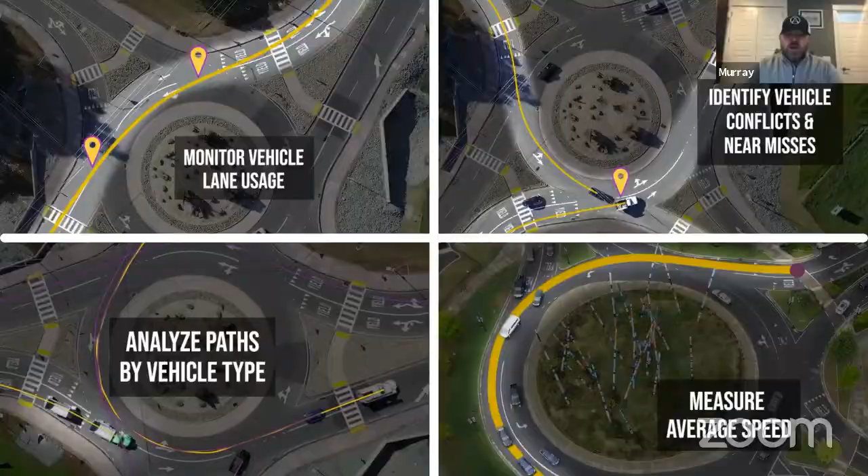Mark Lenters has been really helpful and a front runner in using this technology. We've worked with Mark and Kimley-Horn on a number of projects in multiple states. And I just wanted to highlight quickly one we did for him, looking at truck traffic specifically around a large commercial location. Using the drone technology and the AI software, we're looking to provide unique vehicle identification numbers, looking at lane tracking, specifically, what lanes are the trucks using going through the roundabout, and from a heavy truck standpoint to see if they were utilizing individual lanes or cutting corners based on the size of the roundabout.

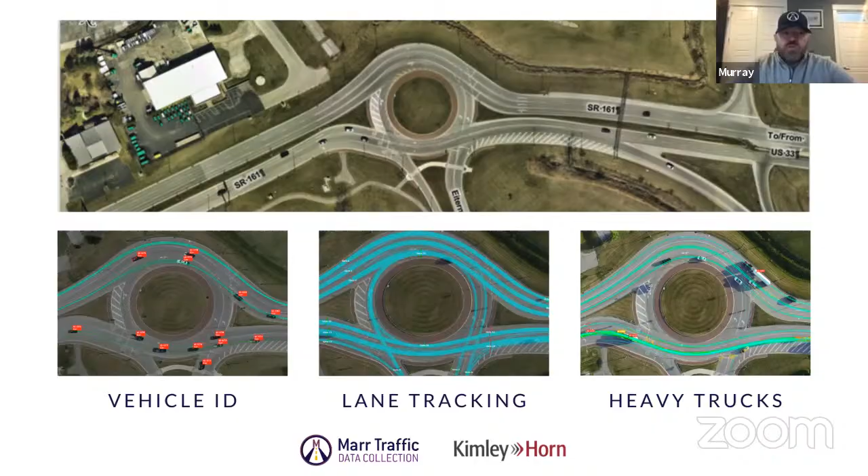So Mark has got a lot of information and knowledge on this subject. So if anyone wants to speak to him specifically about that, I'm sure he'd be glad to give you some other thoughts. The drone footage is great for not just roundabouts, but we can utilize it for standard intersections, interchanges, and more complicated information purposes, specifically looking at some short range origin destination and things like that. So it really is an opportunity to utilize this technology for some more complicated and interesting opportunities. And now I just wanted to finish off by sharing a short video and showing you some of the highlights in action.

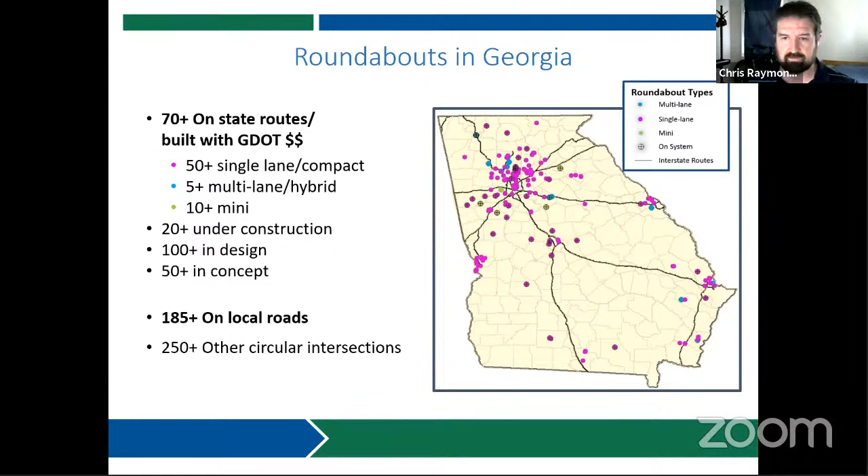And talk to you really about why we created this guide a year ago, and why we're updating it. As you can see, we've got over 70 roundabouts on the ground, and that's been put down over the last 20 years. But what we're seeing now with the introduction of ICE, intersection control evaluation, is that we're getting just a ton more moving to construction and design. So you see 20 under construction, 100 in design. The 50 in concept's probably conservative. And what we really decided we needed was something that would help younger engineers. As we get this many projects, there aren't enough Mark Lenters of the world out there to design every roundabout that we're putting down. So we really thought it was important to get this guide out to assist the younger, less experienced designer with roundabouts, to get them some good guidance on how to properly design a roundabout.

And the existing material that's out there, chapter 8 of the design policy manual, has some information on roundabouts, but it's pretty bare bones. NCHRP 672 has a lot of information, but doesn't really focus on helping young engineers. We're also trying to focus on practical design. Again, as more roundabouts get out there, costs tend to go up. We don't have the luxury of doing gold-plated designs every time anymore. So really, beyond just helping the young engineer, we're also focusing on elements that would help save cost but maintain a vast majority of the safety benefits that roundabouts provide.

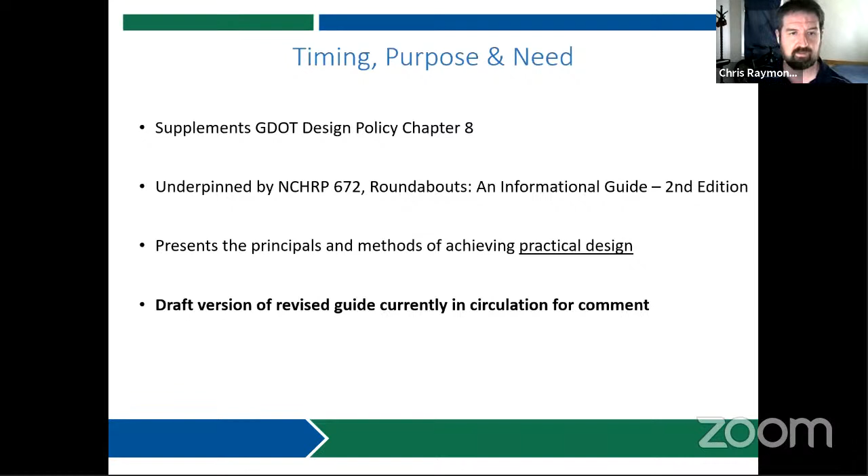So yeah, as you're probably all familiar with, we have single lane roundabouts. We have mini, which are fully mountable, truck aprons, compact, which are basically smaller conventional roundabouts, but they're all pretty, fairly similar. What we're getting more into now, though, in Georgia, we have a fair bit of hybrids on the ground, and we're soon going to be getting more multi-lane. But

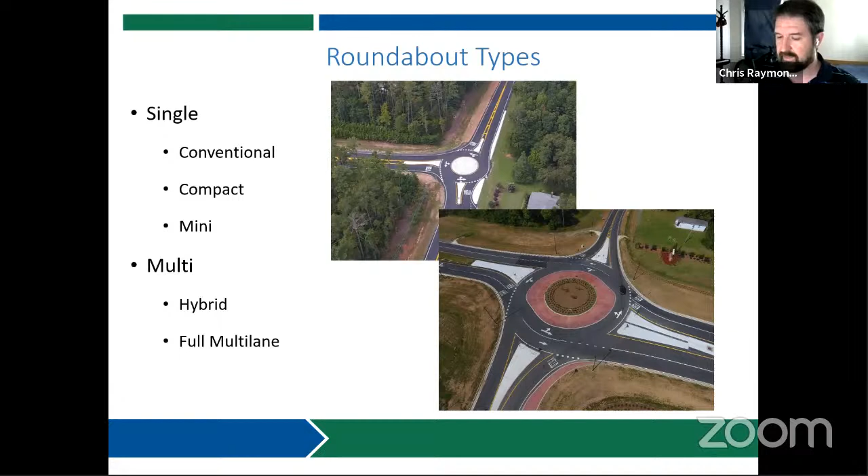So moving directly into geometric design, we have updated our iteration flow chart to really go in and give the designer an idea of the process they should expect as they're developing the roundabout layout. It's not just as simple as drawing a circle, drawing some entries, and you're all done. You got to look at the ops data, figure out your lane configuration, see if it's sufficient,

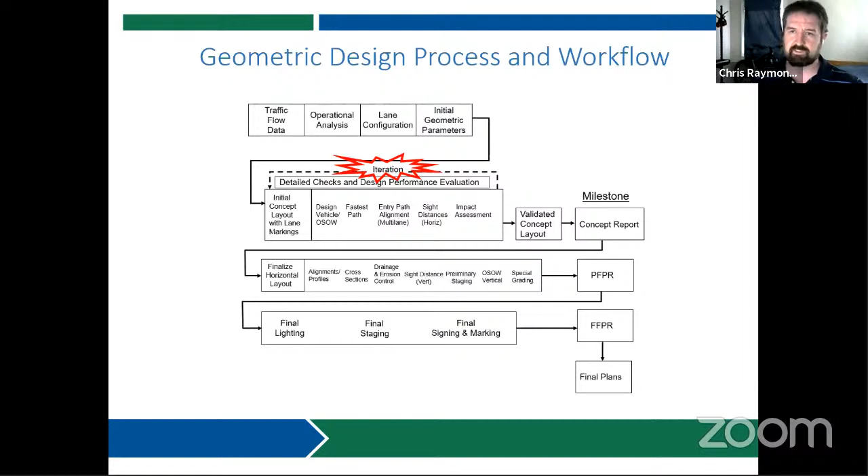and then instead of moving from just a single lane and going directly to a full 2x2, again, for the purpose of practical design, we're looking at adding lanes on the legs that are necessary in the configuration that's most economical and honestly the safest. If you add a full 2x2 when you don't need it, you're adding more conflict points that didn't need to be there. So really focusing on the iterative process of going through and adding lanes as needed, right turn bypasses or dual entries or dedicated lefts, things of that nature.

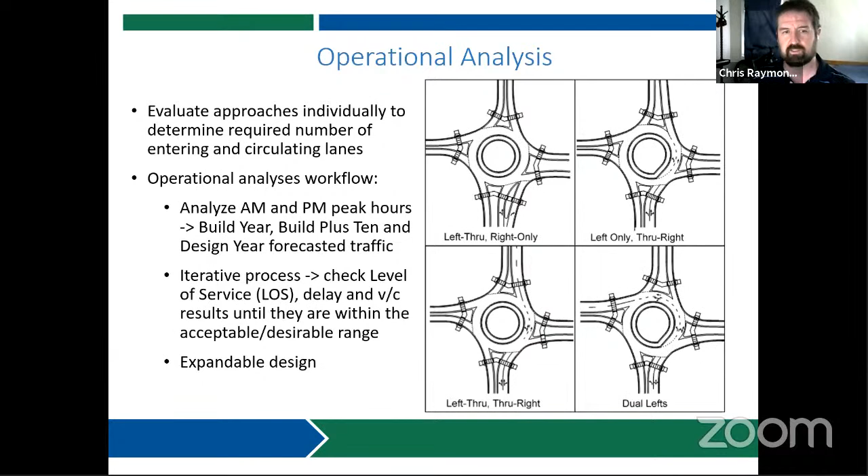And the way we are guiding engineers to do that is with Sidra as our preferred analysis tool. It has a few benefits in that it has multiple formulas that you can use in one package. They got the Sidra specific formulas as well as the HCM formulas, and it also has the benefit of having pretty pictures. So you can look at the roundabout and see exactly what you're drawing, or see if what you wanted is actually being displayed correctly. That's really useful, and not as clear on some of the other analysis tools.

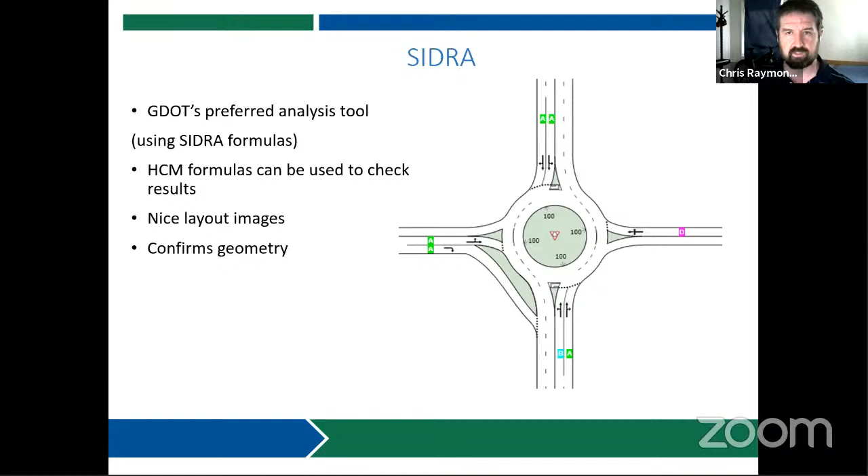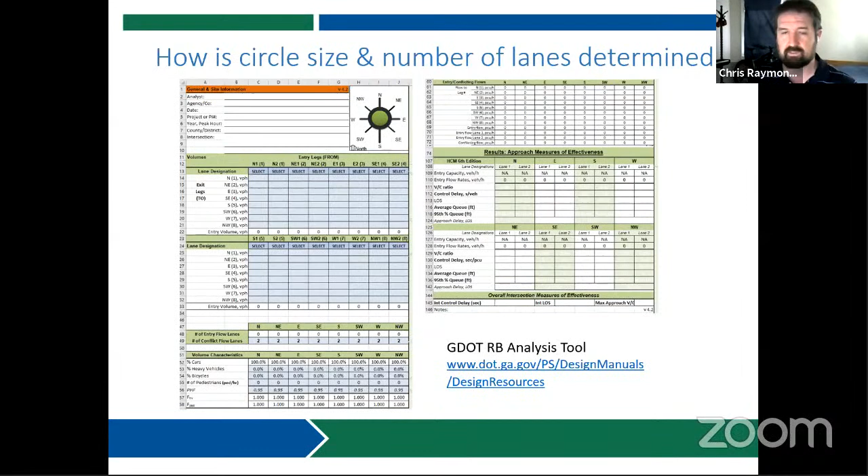Not that we want to dog them, certainly. I mean, the roundabout analysis tool is a very good tool to use as well. It focuses only on the HCM formulas, but yeah, it's good. It doesn't have the whiz bang displays, but it's free, so good to pay for.

Some of the core elements that we're focusing on for young designers, or on all designers, I suppose, is ensuring space for trucks, proper speed reduction, adequate sight distance, but not too much sight distance. Accommodations for cyclists and pedestrians, and also especially on multi-lanes, providing path alignment and channelization, so ensuring the driver knows which lane to be in and has a clear path to maintain that lane, and knows which lane they need to carry forth into as they navigate the roundabout.

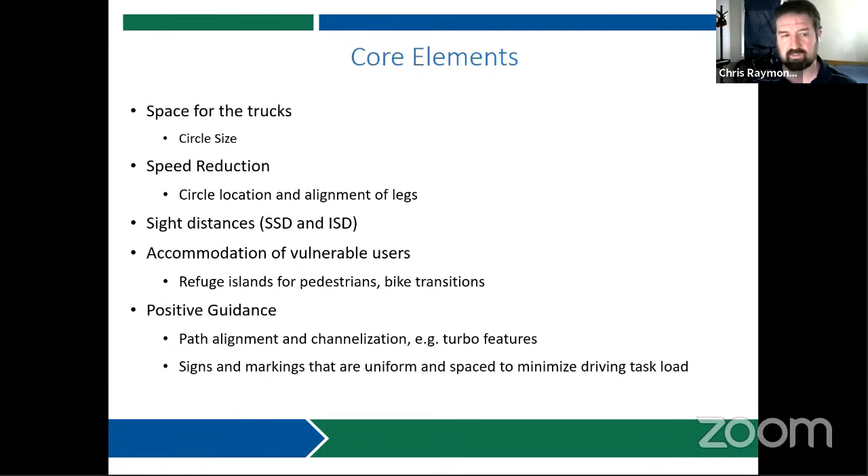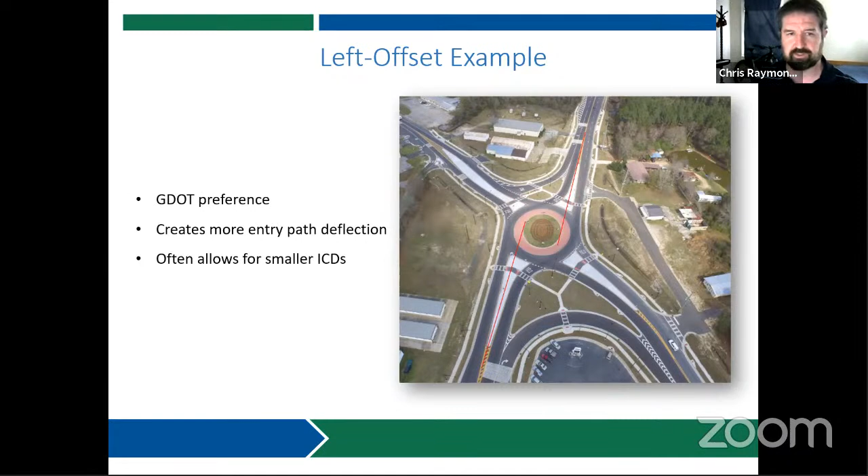An example of the path alignment and speed control is a left offset example I'm showing you here. It's a preferred layout. It helps with speed control on entry paths. It helps with reducing the inscribed diameter, which again goes to providing more compact design, which helps reduce costs. So couple that with helping young engineers. That's what this is all about.

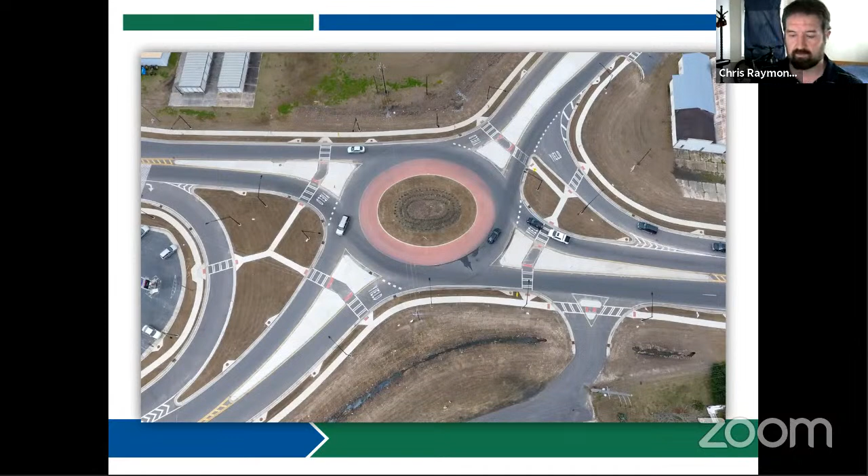Here's an example down in Colquitt County. Had a heavily skewed intersection, and along with providing left offset, we also utilized the additional space. Instead of creating a large circular intersection, we stretched it out into an ellipse to maintain the speed control that we needed, as well as allowing truck movements, but didn't have to go to a large round circle and take up more right of way or increase overall cost of the project.

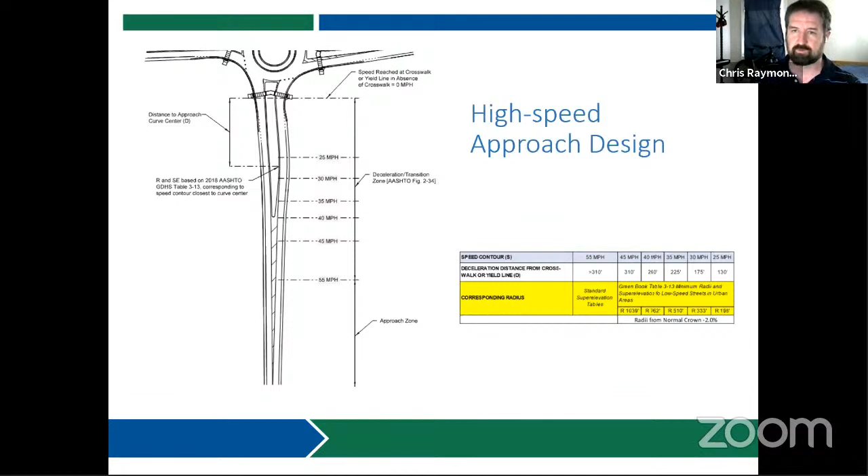Another section that we're focusing on that has come up a lot with design is the high speed approach. How you're stepping down superelevation as you're approaching a roundabout that comes in on a curve. There's been a lot of questions on how that's handled, since the expectation is that you slow down as you approach a roundabout. But there was really no clear guidance on how you would step down your superelevation. You don't necessarily want them coming in with full super as they're getting closer and closer to the roundabout.

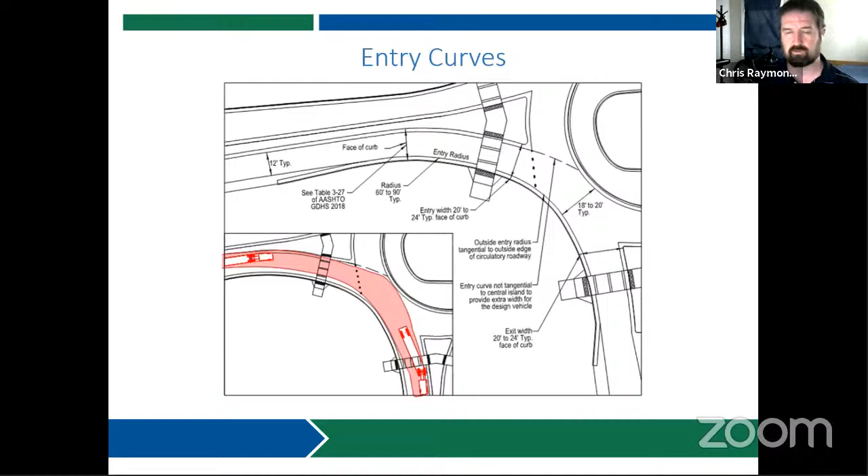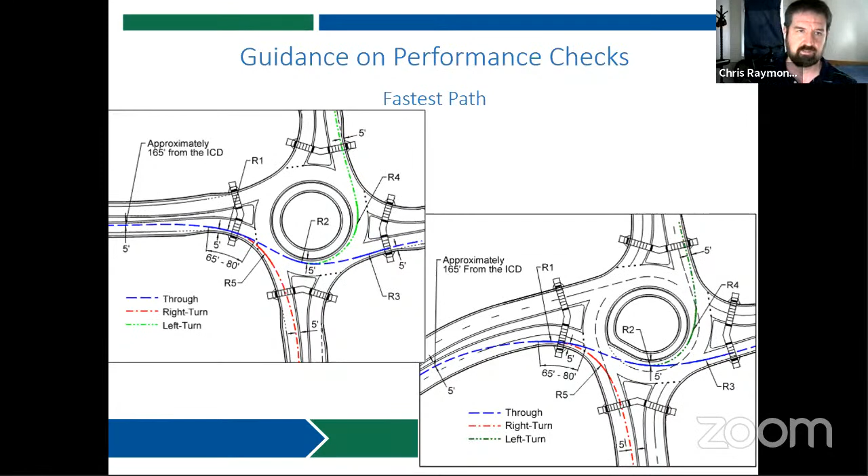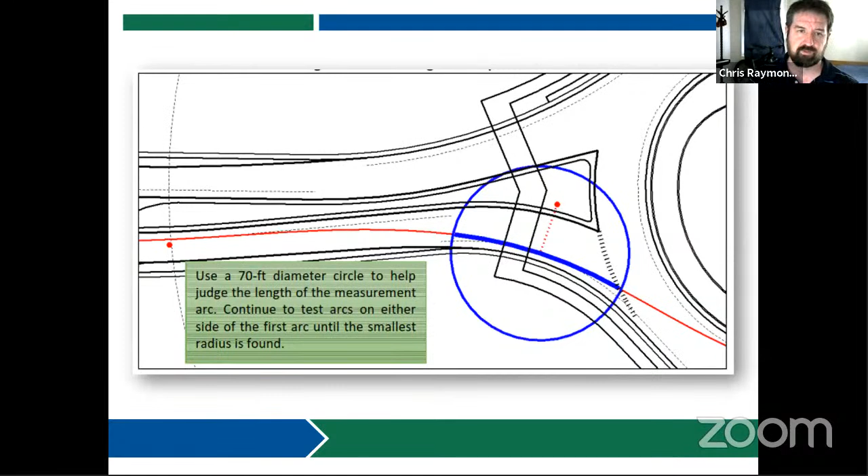We'll also talk about entry curves as far as providing speed control and truck accommodations. We provide step-by-step guidance on how to do proper performance checks for entry speeds, exit speeds, and even small tips on shortcuts on how to do it quickly and do it well.

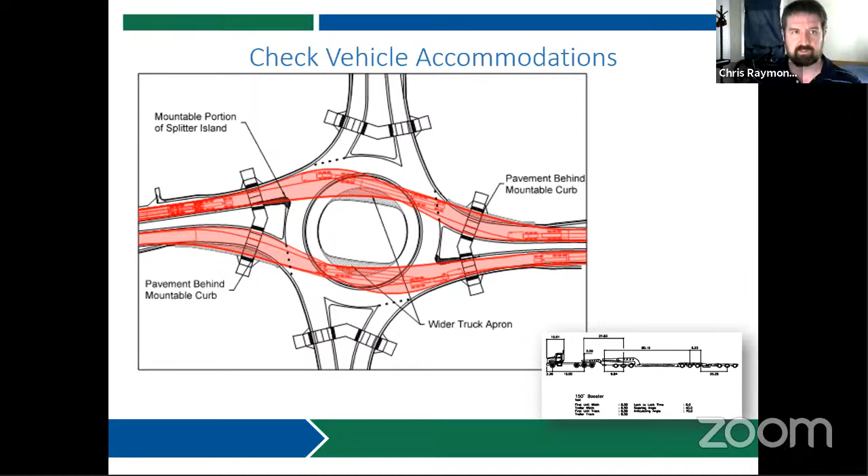Some additional considerations we outlined for engineers are things that they might not consider otherwise, such as using outside truck aprons for accommodations of check vehicles, or even the standard design vehicle, to help reduce the overall footprint and again save cost. So going through that, we talk about how you obtain OSOW permits, and then with truck considerations, also going into great detail with the 3 truck cases.

We have case 1 where the truck isn't expected to stay in the lane either on entry or navigating the roundabout. Case 2 where the truck stays in lane on the entry, but as they're circulating, they take both lanes. And then case 3, which typically has been a fairly large roundabout, where the truck stays in lane both on entry and as they're circulating.

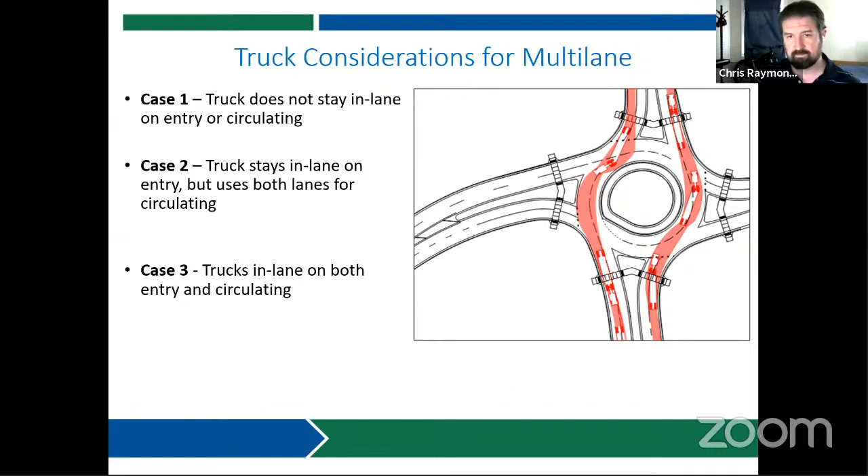But as I mentioned before, we're again adding more turbo elements to not only help with design, creating efficient design, but also it's really our assumption, and I think this is borne out by the data, that it's not really clear to a lot of truck drivers what kind of case roundabout we were building. So these physical elements that we're adding with case 2 and case 3 on entry and through the circulatory roadway help confirm to the truck driver that they're supposed to be staying in their lane, which I think is very useful.

And there have also been some benefits as far as truck accommodations, because you can increase lane width without compromising speed control with these raised elements. So hopefully we'll see smaller case 3s being developed, which will provide good truck accommodations and more cost-effective solutions.

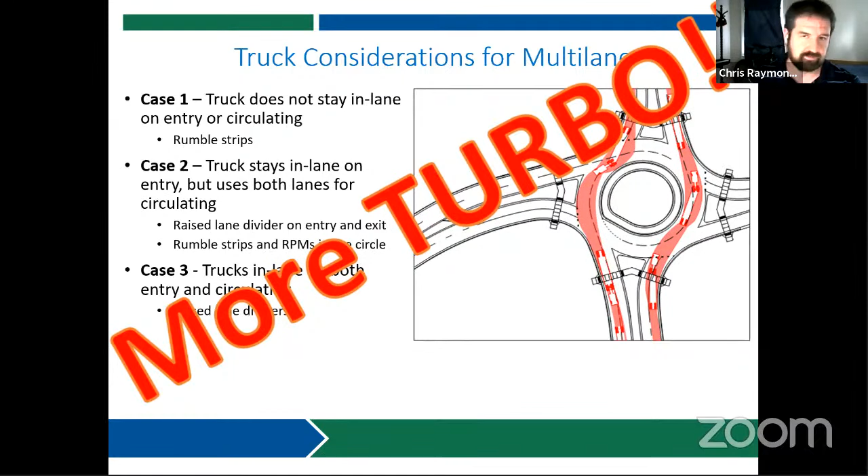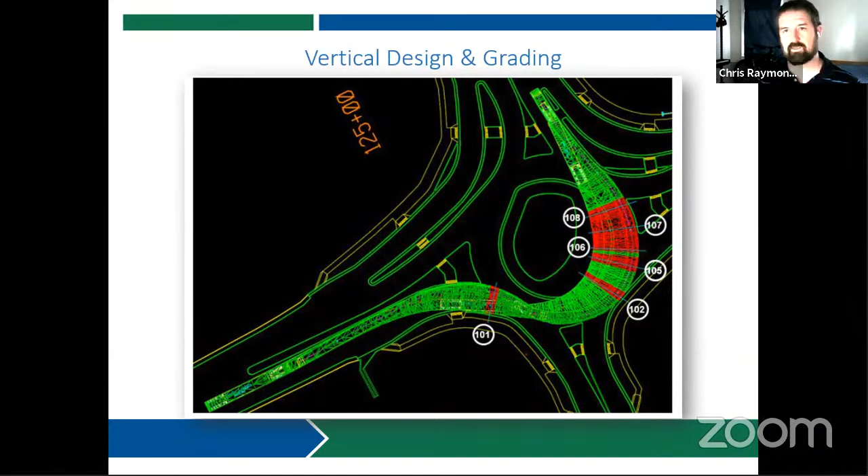We get into some path alignment concerns, making sure that's being done correctly. We introduce designers to checking vertical profiles to ensure low boys and things of that nature aren't dragging their bellies across the truck aprons. We go into a good bit about our preferred solutions on cross sections, going full depth with curb and gutter as opposed to header curb, which used to be the norm, or even better, typically cheaper, just putting the truck apron on existing asphalt. That has a lot of benefits for staging and speed of construction.

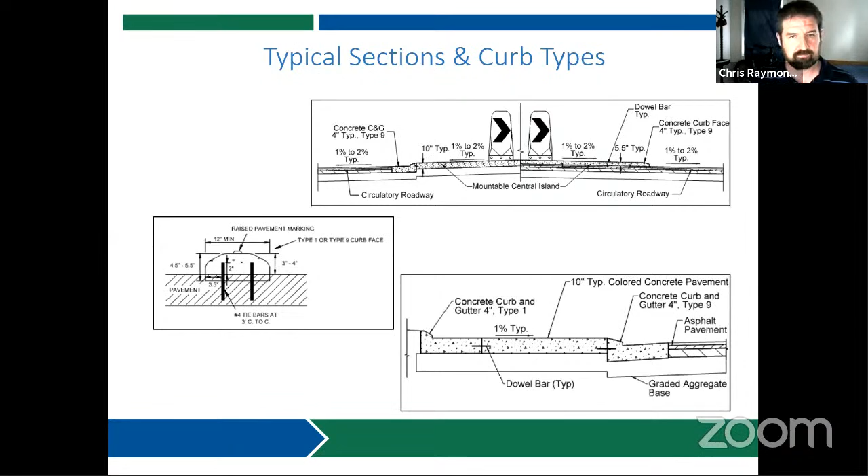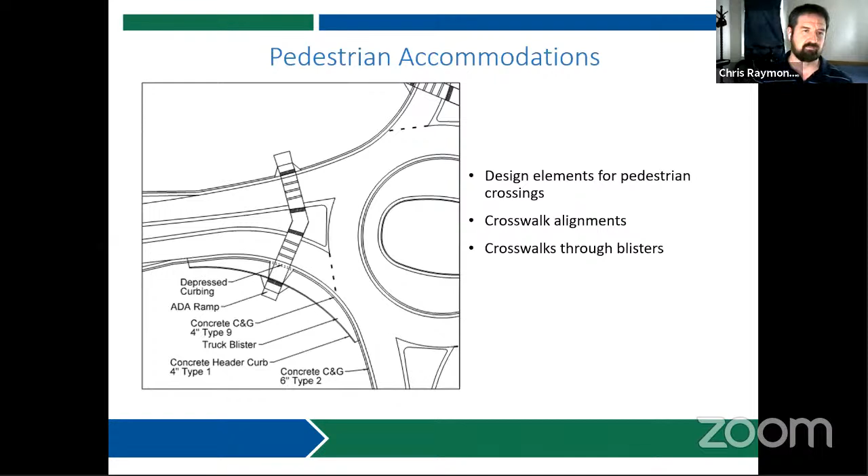We're also introducing some information on crosswalks, especially in areas with the truck blisters I mentioned before. There's really a right way and a wrong way to do that. We want to make it clear when you're introducing truck blisters that the pedestrian knows they shouldn't be standing where the blister is, because obviously if the truck comes through, that's not a good place for them to be. So we're providing good guidance on how to do that properly.

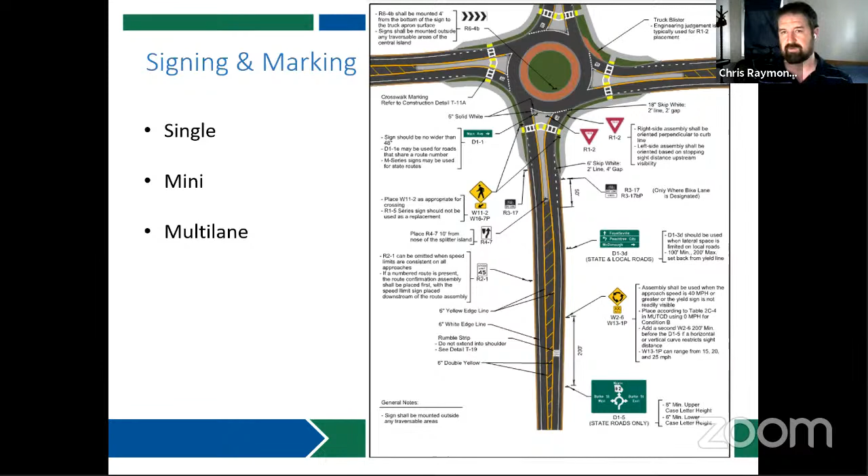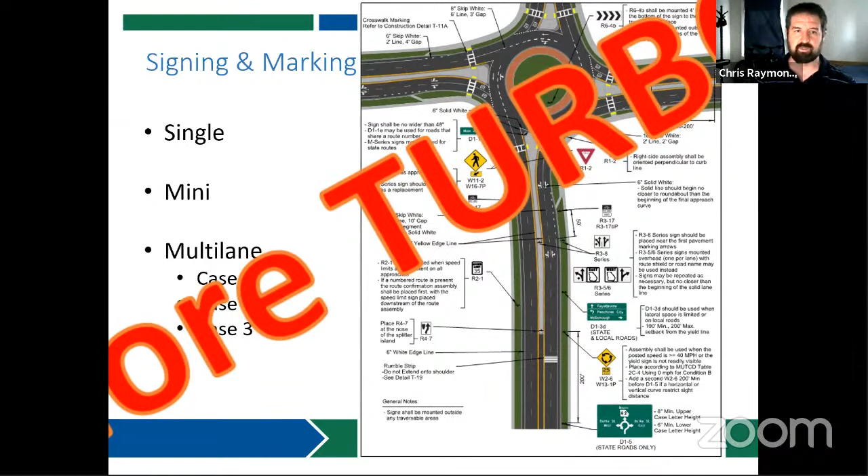Finally, moving into signing and marking and truck control devices. For signing and marking specifically, we're going to have layouts to show the signage for single lanes, minis, and multi-lanes, case 1, 2, and 3, which yet again gives us more turbo. So we'll have layouts on how to do the raised elements, how to guide the striping, the overhead signs that we want to start putting on multi-lane roundabouts, all that jazz.

After that, we're getting into RRFBs and pedestrian hybrid beacons, explaining where these might be considered and how they should be introduced to the design. We're also introducing a section on metering, at least initially introducing it as a retrofit option for roundabouts that are starting to underperform due to specific traffic flows and things of that nature. It goes into how to do that properly, and things like that.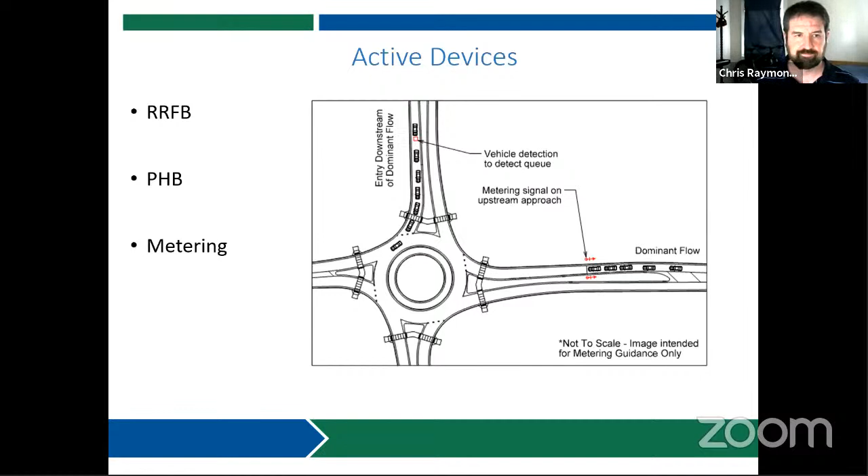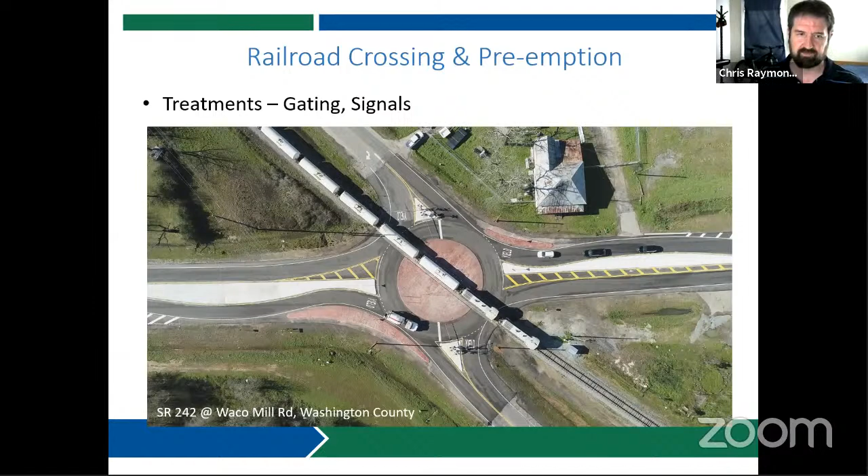We've also put a lot of work into creating a guide to the best way to approach rail crossings. A lot of these older intersections in rural neighborhoods are very close to existing trains, so it's definitely not a clear situation how to introduce a roundabout there. So we're providing a lot of good guidance on how to control traffic around train crossings.

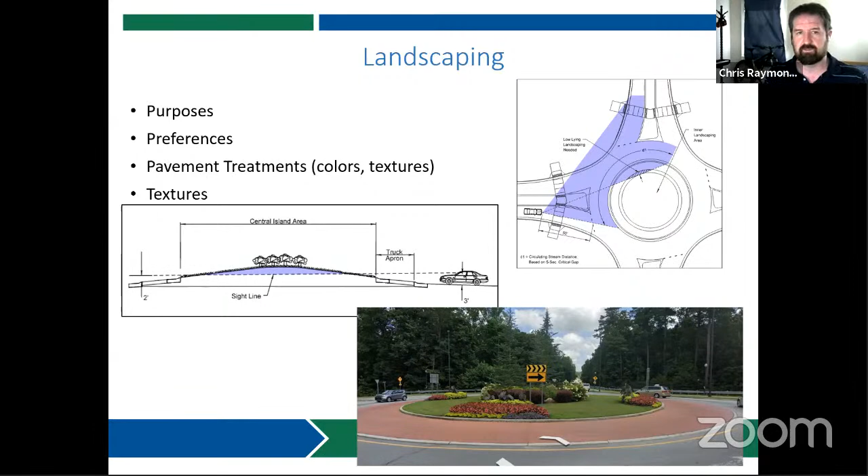We get into landscaping, which you typically wouldn't consider a traffic control device, but for roundabouts, providing the mounding, the trees, the flowers, and stuff like that as visual aids for the driver to know they're approaching a roundabout is really important. So we focus on showing how to do landscaping as it pertains to sight distance, as well as differentiating stamped concrete on areas that are mountable and non-mountable with different colored patterns.

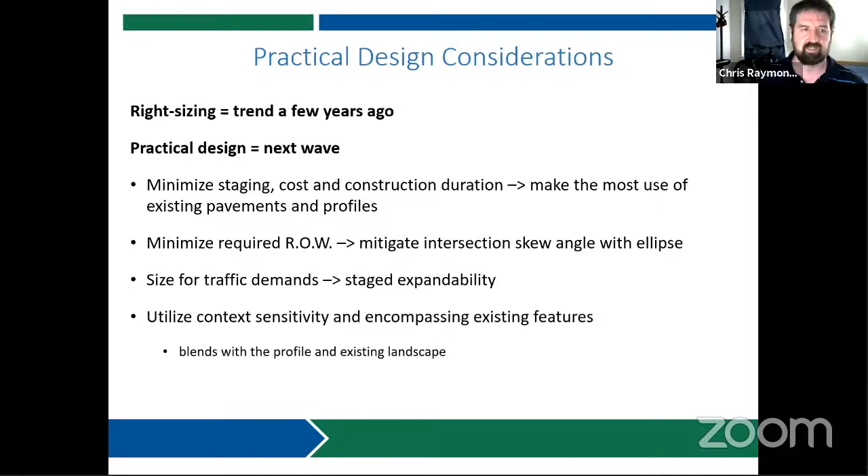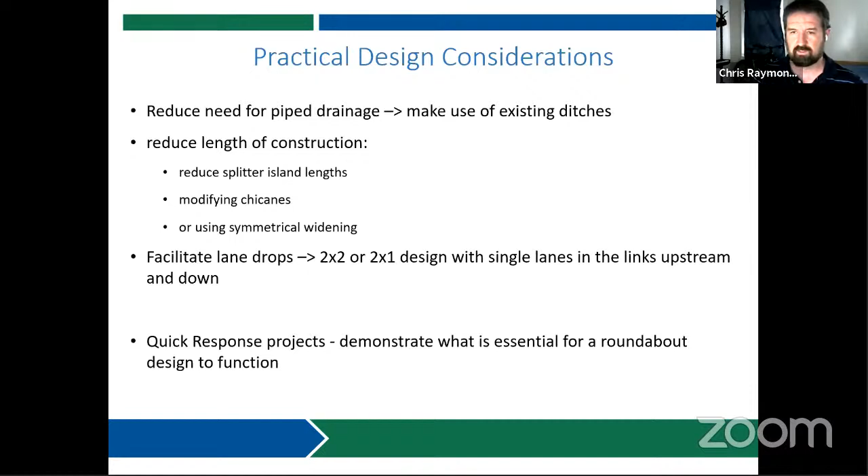And again, a big part of this guide is practical design considerations: minimizing cost overall, reducing the size of the roundabout, minimizing impacts to right of way, creating the correct size roundabout and not over-designing it. Going with ditches instead of closed drain systems, reducing elements, again to minimize impacts, things like that.

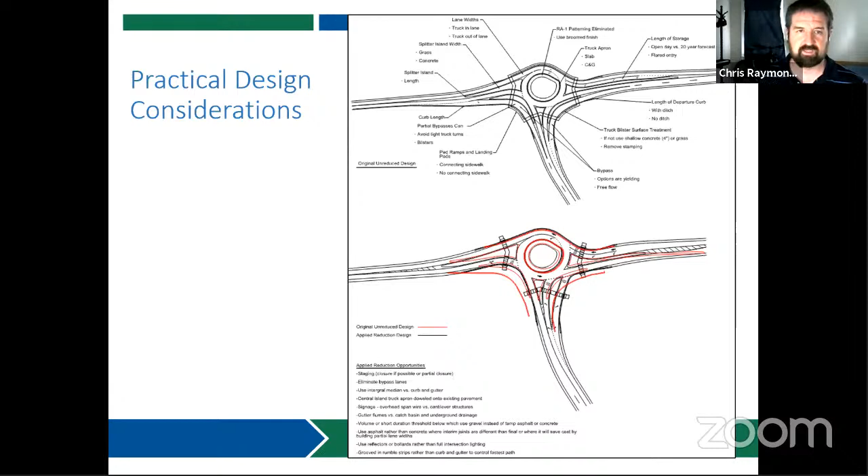Just some examples of practical design in practice. You can see the red bottom image was the original layout, which had some more impacts with those right turn free flow lanes. The circle was a bit larger. We were able to shrink the circle size, but get the performance we needed, and reduce the impact overall.

And this is a really big example on minimizing impacts. The initial design, while very good at controlling entry speeds and path deflection, was just a bit much. It was substantially more than was really necessary. It was underutilizing the existing asphalt that was already out there. So we went back and sharpened pencils and came up with a much more compact design that provides nearly all of the same safety benefits at a substantially lower cost, making it a much more feasible project.

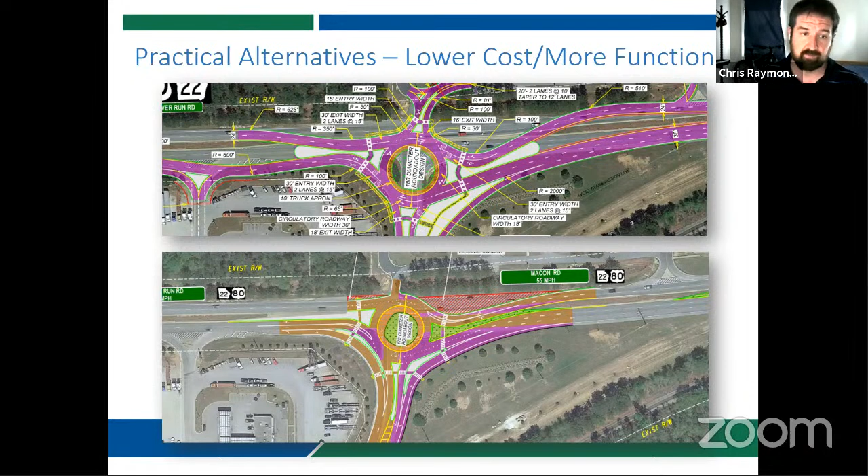And some other considerations on staging. The big thing was putting concrete elements on existing asphalt when possible, because that can go down quick and it can reduce cost to a great extent.

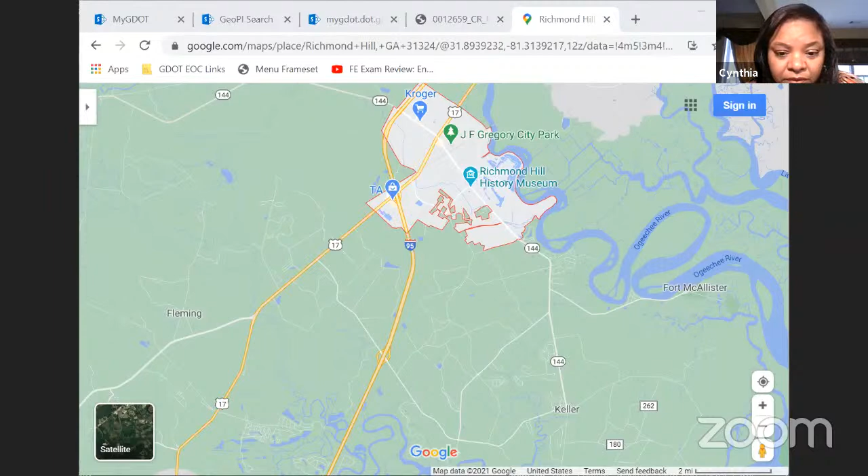Stop sharing that. So this interchange, again, was requested by Bryan County. It was part of their transportation study, as well as the Bryan County, let me get my notes together here.

So the need and purpose of this project was basically to facilitate the growing economic development that we have here, as well as to accommodate residential and commercial growth. It was identified by the Bryan County Comprehensive Land Use Plan, as well as their transportation study. So far, we're very proud that operationally everything is well. You can see based on the drone photographs there's not a whole lot of traffic, but I think Bryan County had the right idea in mind to propose a roundabout here, because I don't see us ever having to touch this interchange again for any major operational improvements.

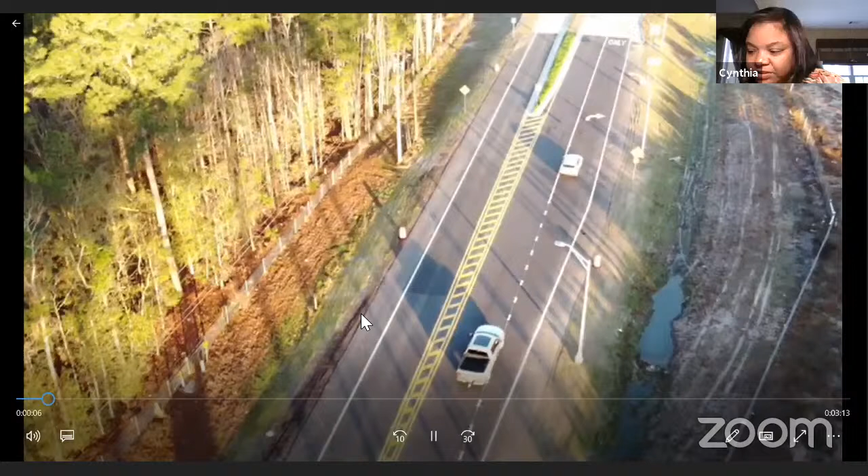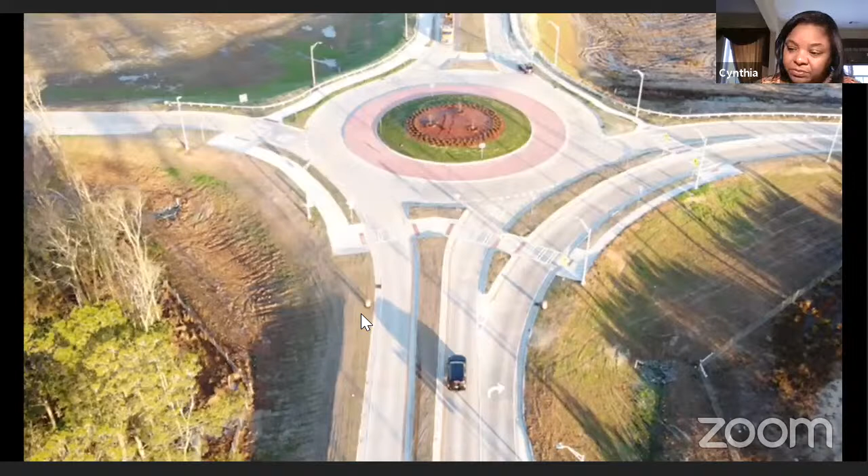So Carol, we have 7 roundabouts - two that are under construction, 5 are already built, and then 1 is being proposed by Bryan County.

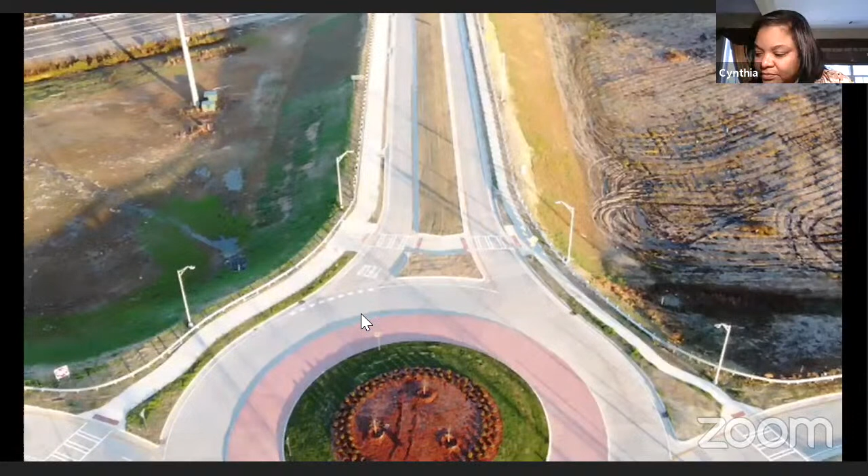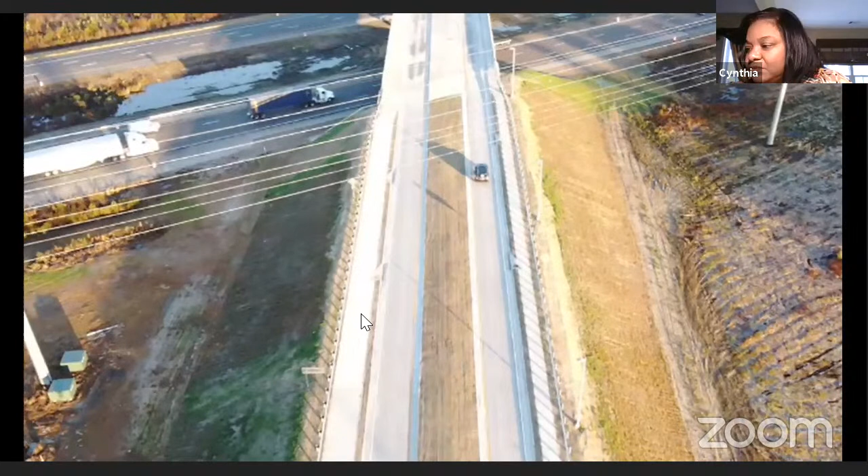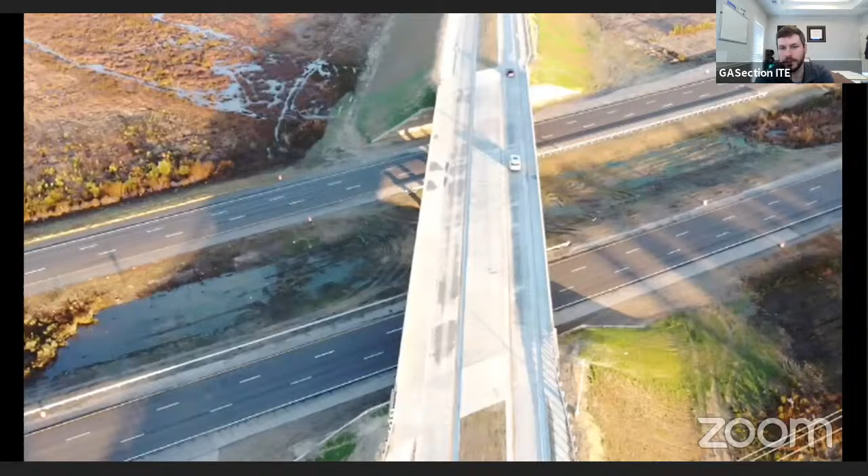What's the timeline on the I-95 at 144 roundabouts? I believe there's about another year left on that, but they're moving along pretty good. I don't have the actual information, but I would say about a year. Okay, sounds good.

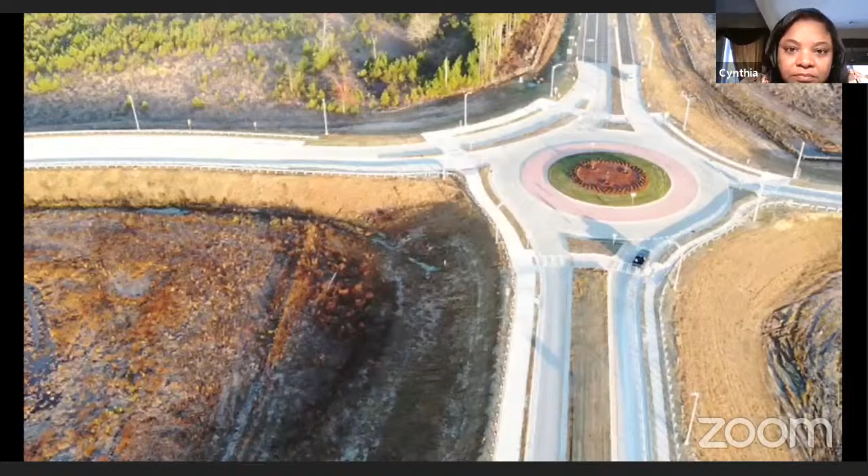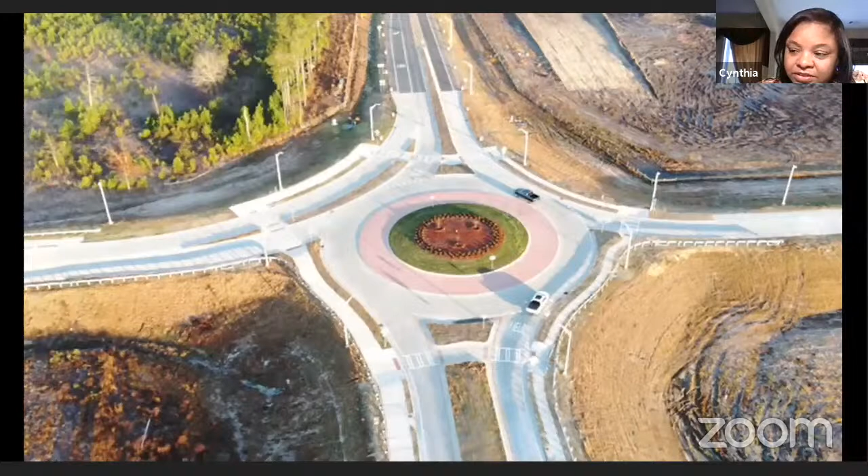And again, this one was actually completed within about 2 years. This also includes a brand new interchange that we didn't have here.

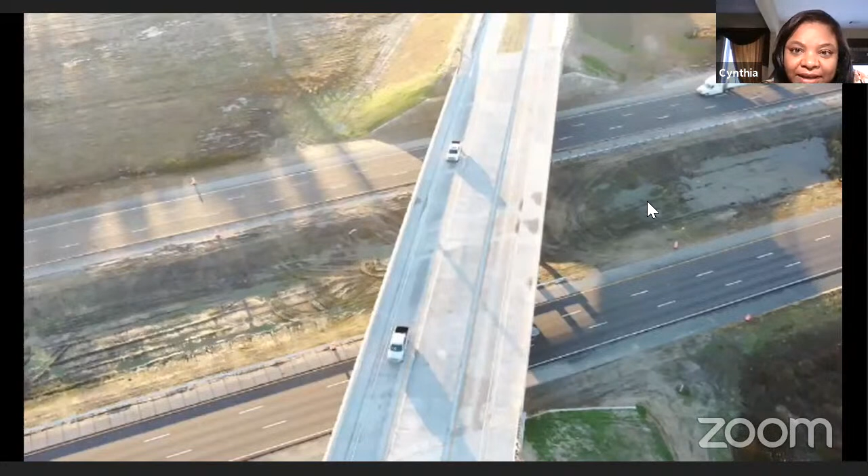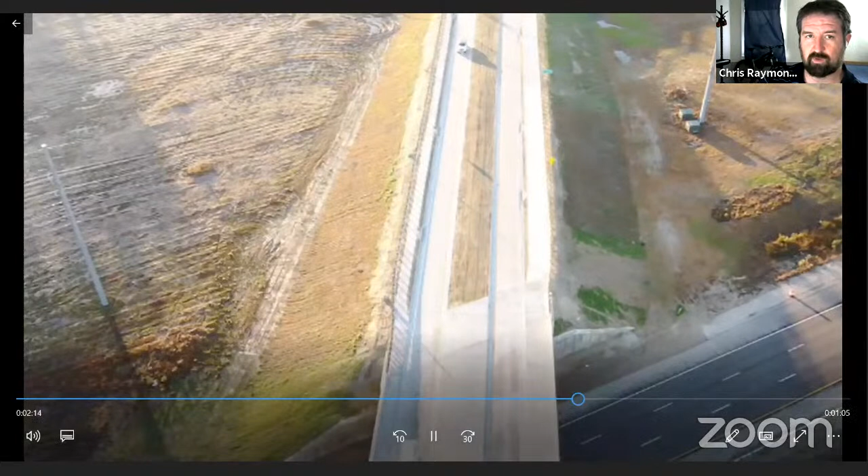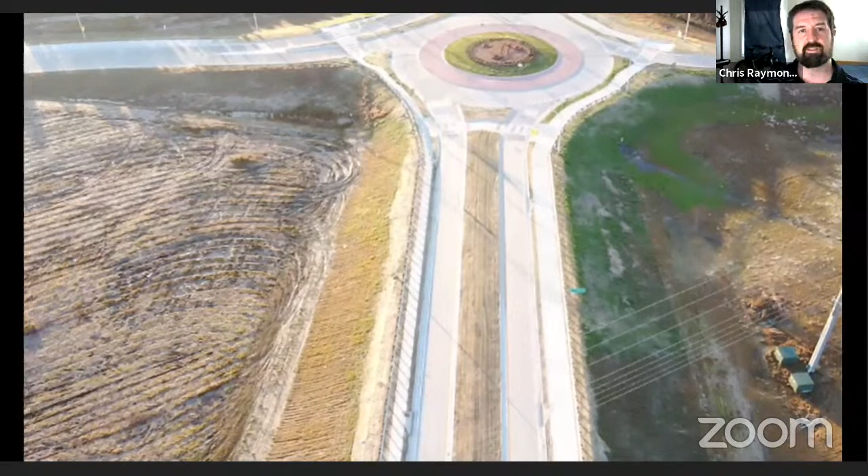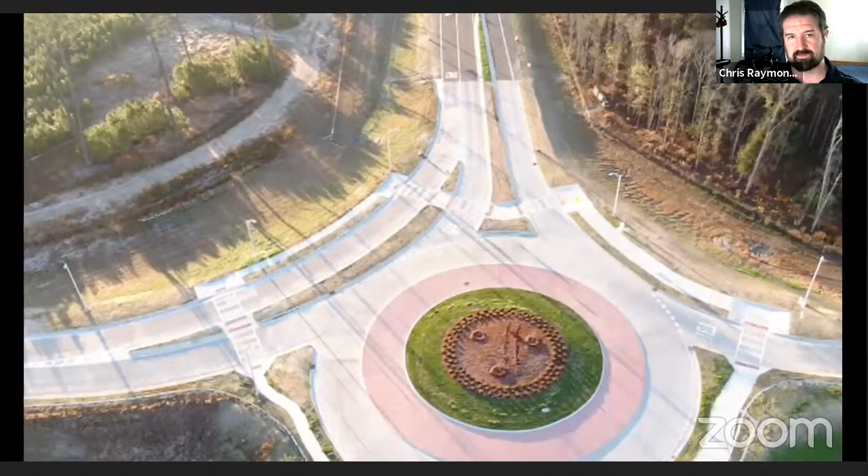Chris, do you have anything you want to add to this particular interchange? Not really a whole lot. It's great to see more interchange roundabouts, it's definitely important. We work with the districts whenever we can to help out with these and make sure they're designed as safe as possible. The great thing about single lanes is that they show themselves to be very resilient to suboptimal geometrics - even if you're not getting the full left offset and things like that, overall they've been showing themselves to perform well in a lot of less than desirable cases. So it's a beautiful roundabout.

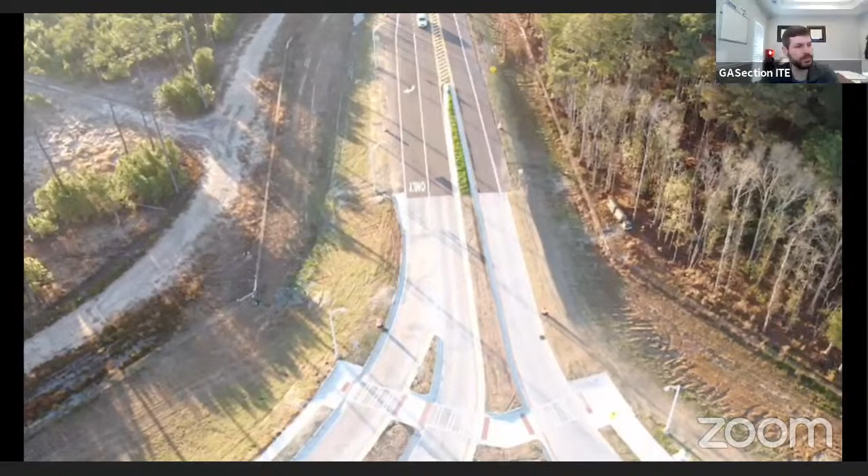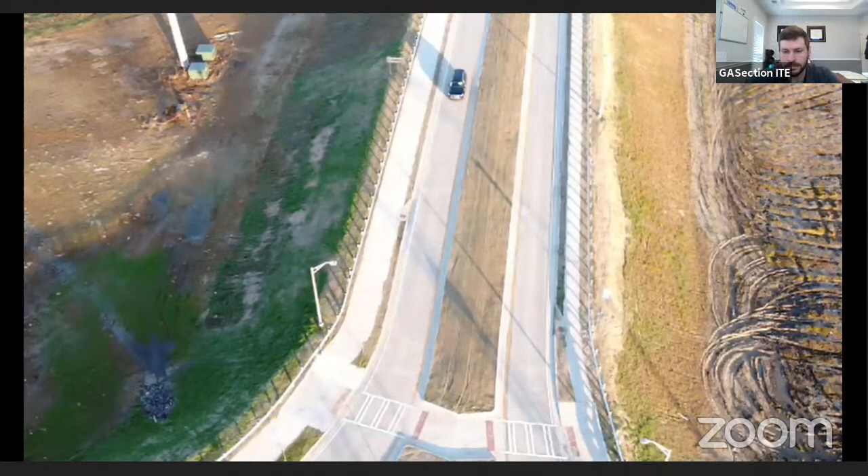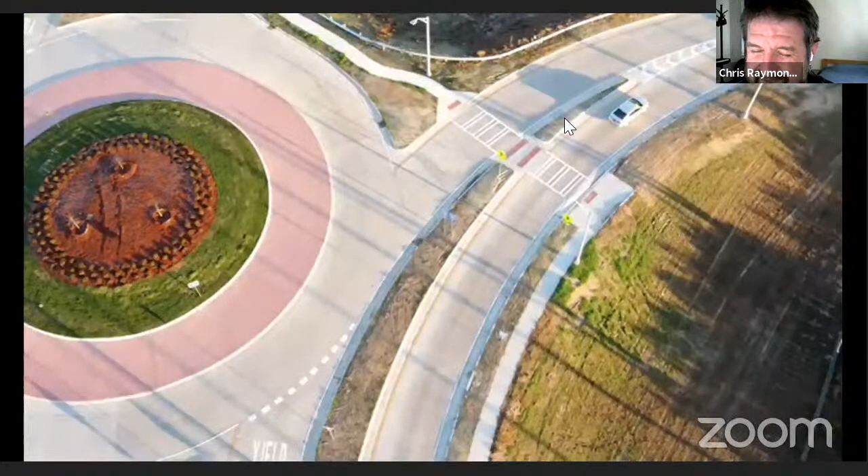Chris, we've got one question directed towards you: when designing a single lane roundabout, do you determine the entry path curvature radius based off typical values, or how would you determine that? Yeah, I think I'll get back with them offline on that one. We're really just running your truck paths or your fastest paths to really set the radius and then build it out from there.